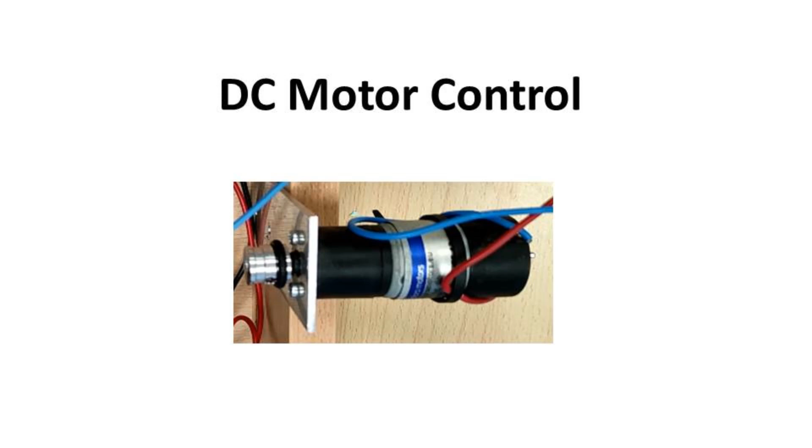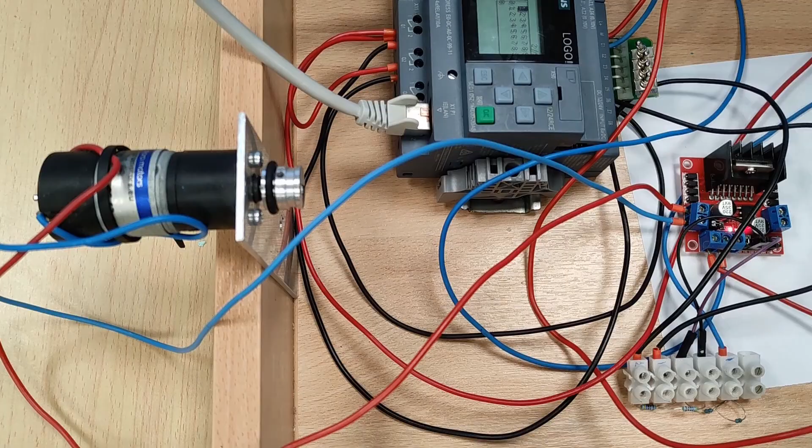This video discusses the principle of controlling DC motors using a bridge circuit. The operation of the L298N integrated circuit is also discussed. The video shows the step-by-step creation of a management project.

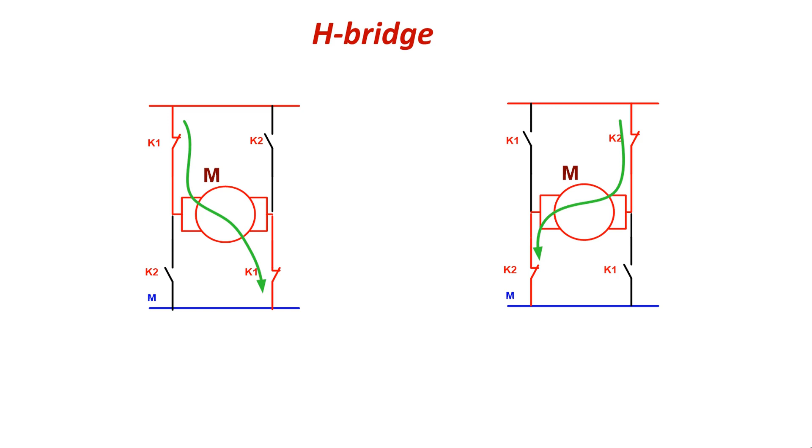An H-bridge is an electronic or relay circuit that allows voltage to be applied to a load in different directions. This changes the direction of the current and the direction of rotation of the motor. When output Q1 is turned on, relay K1 is activated, with the help of whose contacts the motor is turned on in the positive direction; the motor rotates in the plus direction. The direction of rotation is arbitrary.

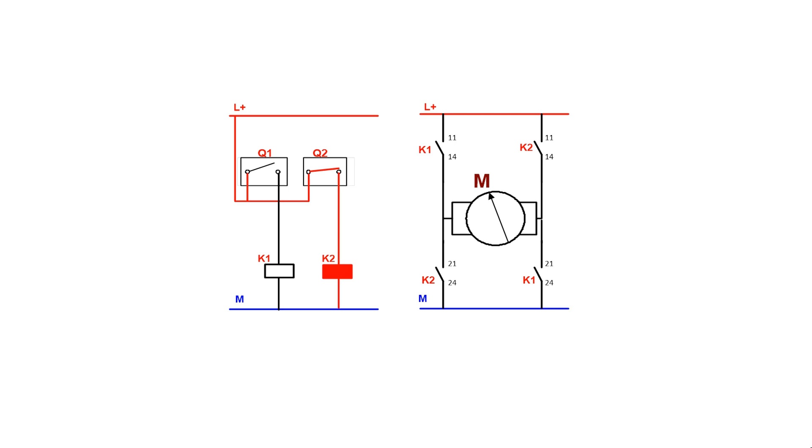When output Q2 is turned on, relay K2 is activated, with the help of whose contacts the negative direction of rotation is switched on. The motor rotates in the minus direction. What happens if both relays fire at the same time? The result will be a short circuit in the motor power supply circuit.

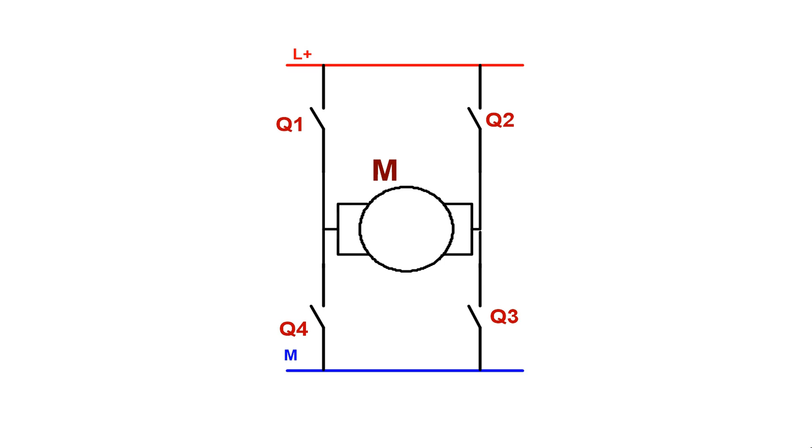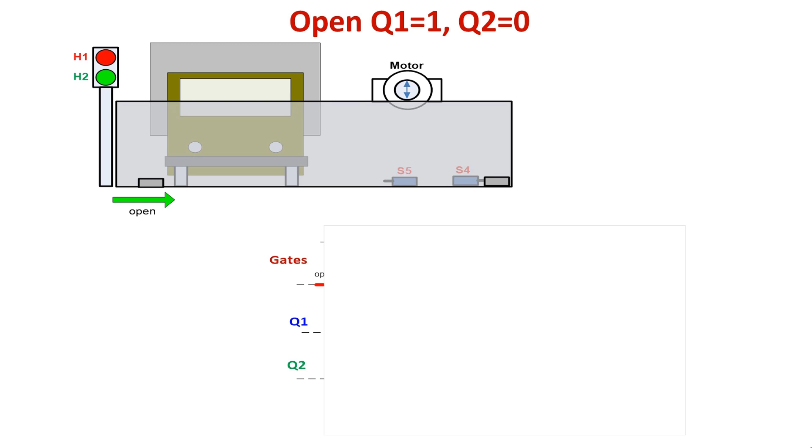The bridge circuit can also be implemented on the basis of normally open contacts of the controller output relay unit. Let's create a control project based on a DC motor. Automated gates open when you press button S1. By pressing the second button, the gate begins to close. In the final retracted position, the gate stops.

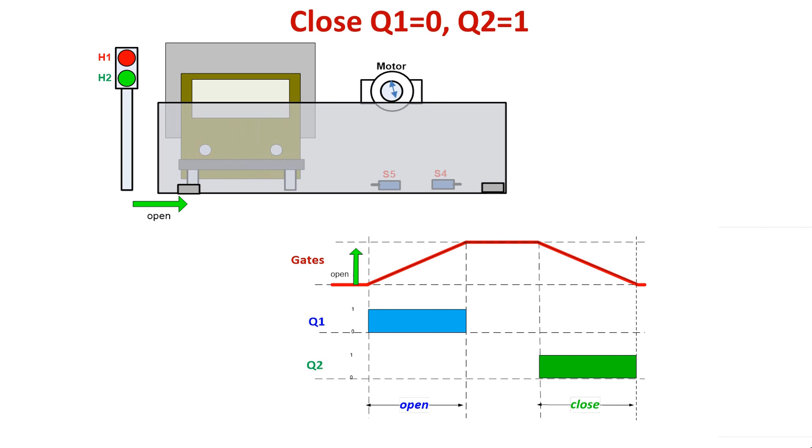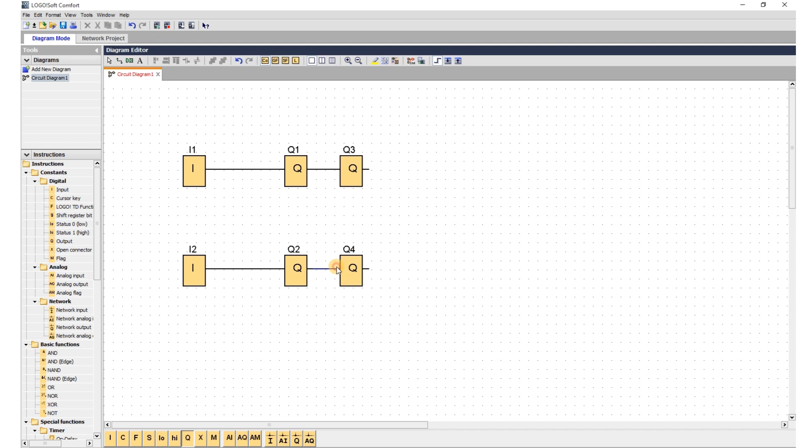We use the simplest control method: a bridge circuit and 2 control buttons. 2 relay outputs will turn on simultaneously. Moreover, outputs Q1 and Q3 determine the direction of rotation in one direction, for example, in the plus direction, and outputs Q2 and Q4 cause the motor to rotate in the other direction.

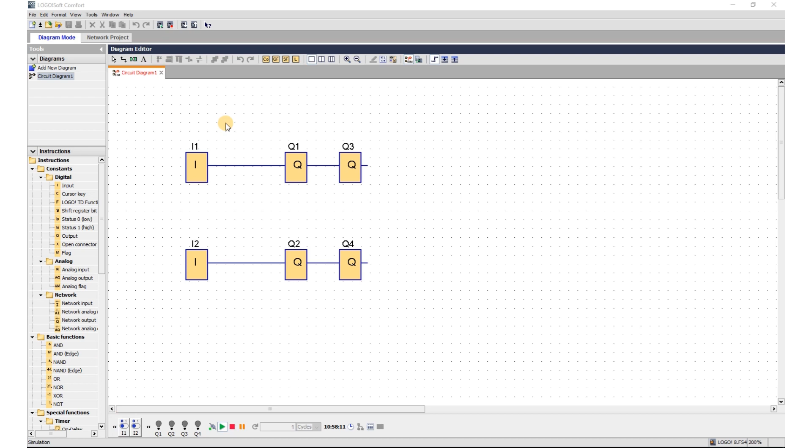The motor can rotate in one direction, doing, for example, some work to open, stop and rotate in the other direction, that is, it reverses. Let's change our program in such a way that we will have a memory element. Button presses will be short-term. Let's insert the RS trigger function.

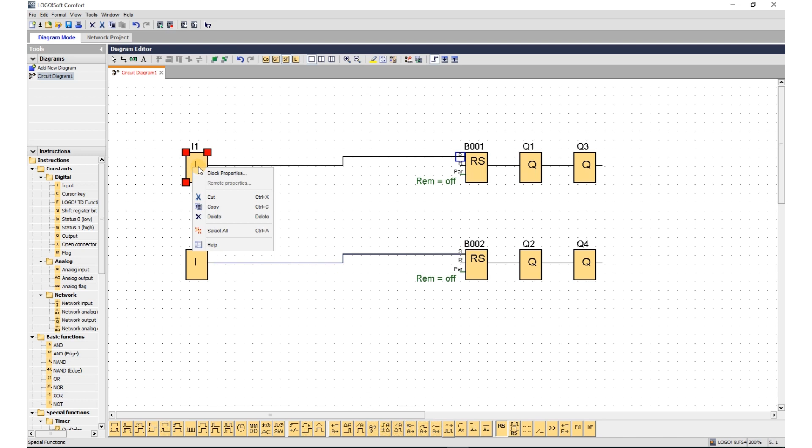The direction of rotation, plus, starts with pressing button I1. Rotation in the other direction begins by pressing button I2. At the same time, our buttons are not fixed. The motor will stop when pressing button I3. In this case, this button is normally closed, without latching. Therefore, it will be necessary to install an inversion.

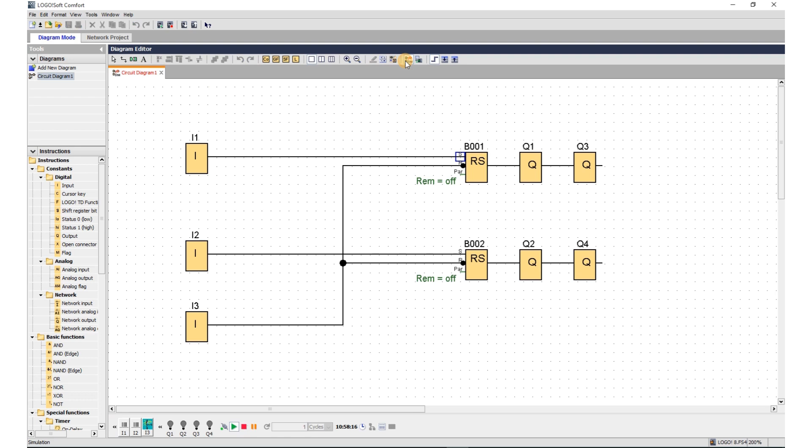So, let's check how the program works. Briefly pressing button I1 turns on the motor with the direction of rotation plus. We must stop. By briefly pressing button I2, the motor begins to rotate in the minus direction until we press button I3. The danger is that you can press buttons I1 and I2 at the same time. Thus, a short circuit will occur in the electrical circuit.

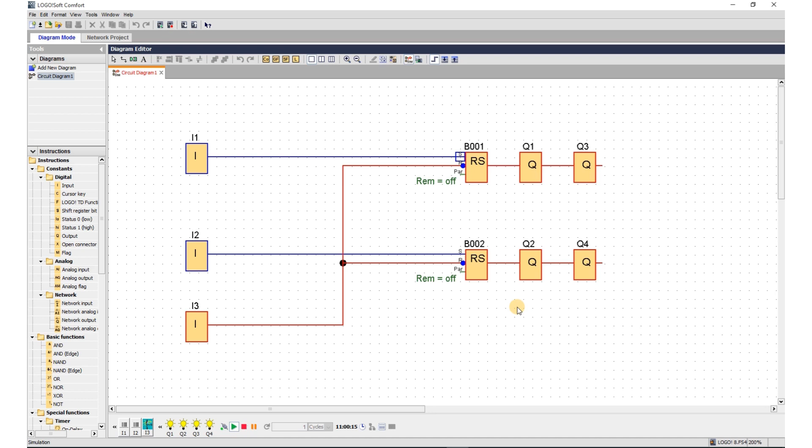Turn on the momentary button I1. Now switching off is possible only with the stop button, I3. The limit switch, which is triggered at the end of the gate closing, does not give a signal. You have to press the stop button, I3. We close the gate; it closes until we press stop.

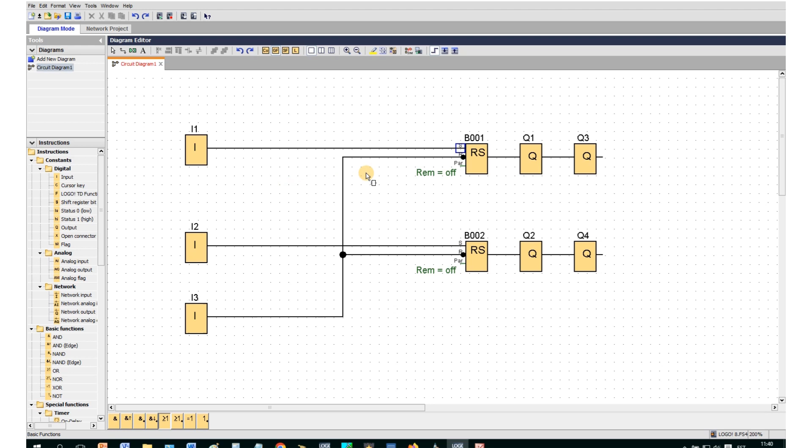So, let's develop our program in such a way that in extreme positions the motor turns off automatically. There are 2 signals to turn off: a signal from the stop button or a signal from the limit switch. The limit switch for movement is I4. The draw-out limit switch is I5. Don't forget to set the inversion, since contact I3 is normally closed.

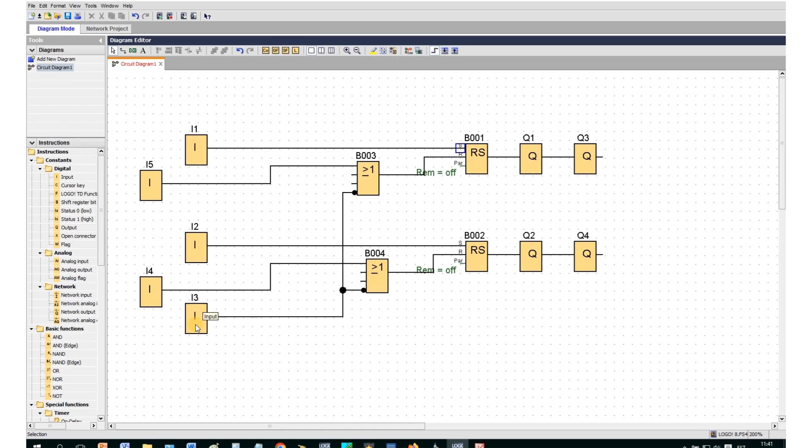However, the disadvantage of this scheme is that the movement can be immediately reversed, which can lead to a short circuit. The project can be automated in such a way that the gate will begin to retract automatically after a specified time after it is opened. The opening will be determined by limit switch I5. We use the on-delay timer. Let's insert it into the program.

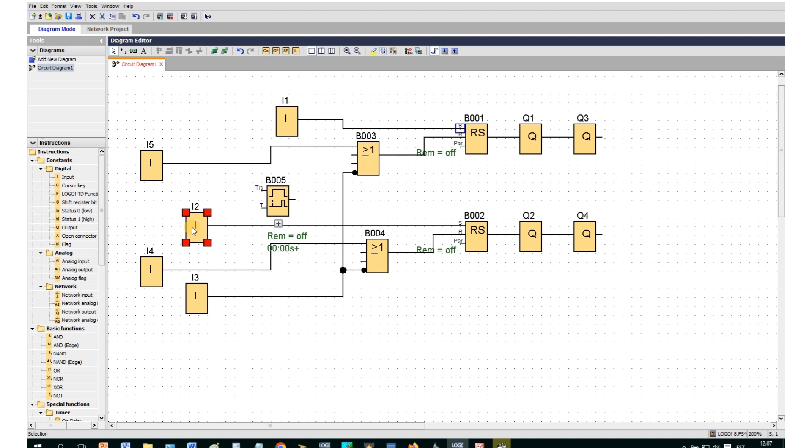Let's erase button I2, since the gate will move automatically based on the timer signal. The input signal will be limit switch I5. The delay time will be 4 seconds. The gates are automated in such a way that after opening the gates, after a time delay of 4 seconds, they will begin to close automatically.

Let's look at the operating principle of the L298 integrated circuit, which can be used to control DC motors. You need to understand that the power of this chip is limited. The principle of operation is based on the fact that this microcircuit contains 4 amplifiers. In order for the motor to start rotating, it is necessary to create a potential difference at the input. For example, apply a logical 1 to IN1, and apply a logical 0 to IN2. If the same signals are supplied, that is, logical zeros or logical ones, the motor will not rotate.

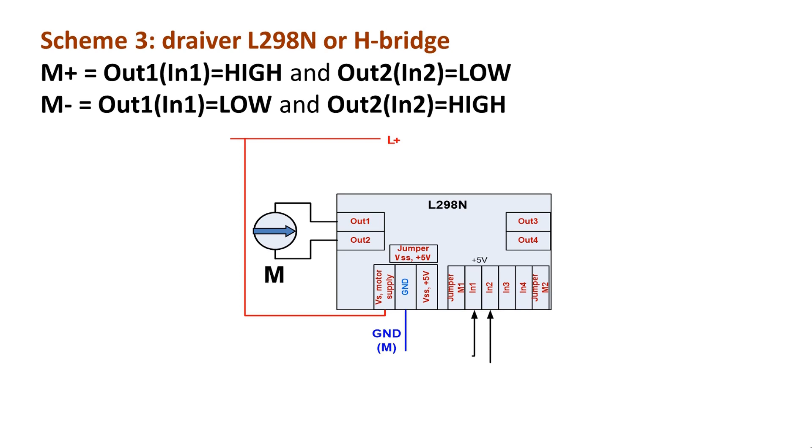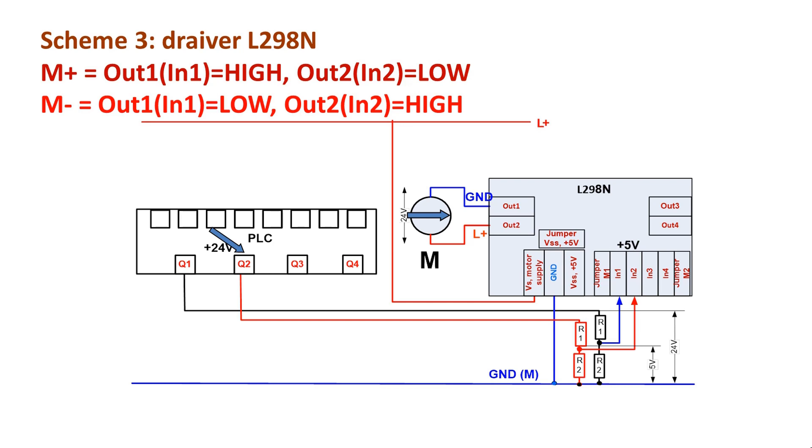If you create a potential difference between the first and second inputs, then a potential difference of 24 volts is also created at the output, and the motor rotates in a certain direction. If output Q2 is activated, then accordingly IN2 is a logical 1 and IN1 is a logical 0. Accordingly, the motor rotates in a different direction. So the driver is connected.

Here is a voltage divider that is connected to the output of the Siemens LOGO for 2 outputs, Q1 and Q2. If a potential difference occurs between the inputs IN1 and IN2, then a potential difference of 24 volts also occurs at the output of the integrated circuit and the motor begins to rotate. In this case, the motor rotates the shaft through a gearbox.

If the signals IN1 and IN2 are absent or both are turned on, then no potential difference occurs and the motor does not rotate. If you turn on both inputs at the same time, then the motor stops. There is no potential difference.